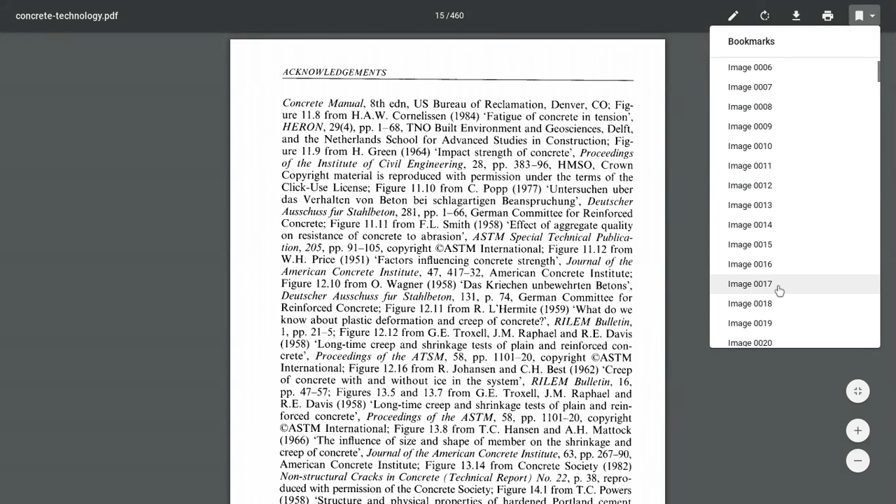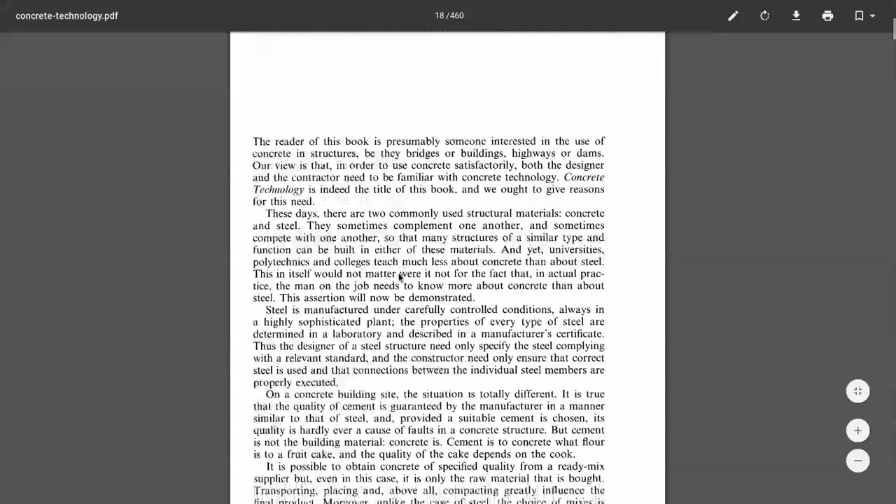Concrete is a structure material. What is concrete? Concrete is a material.

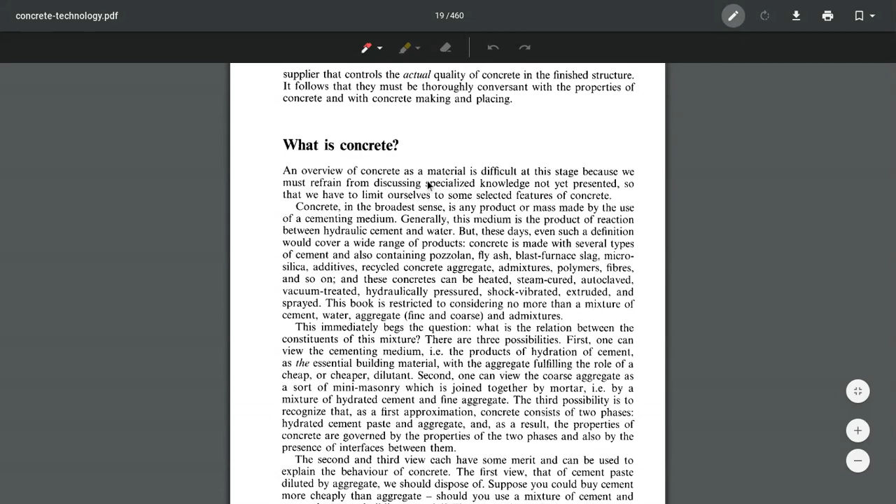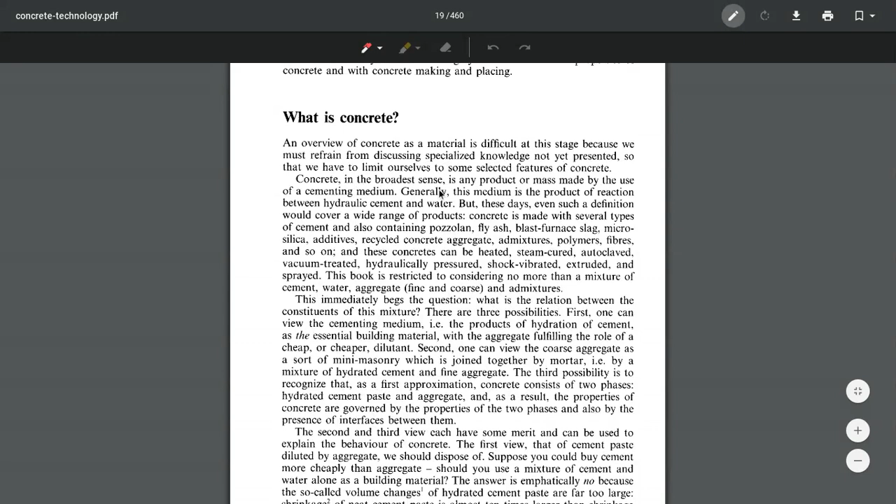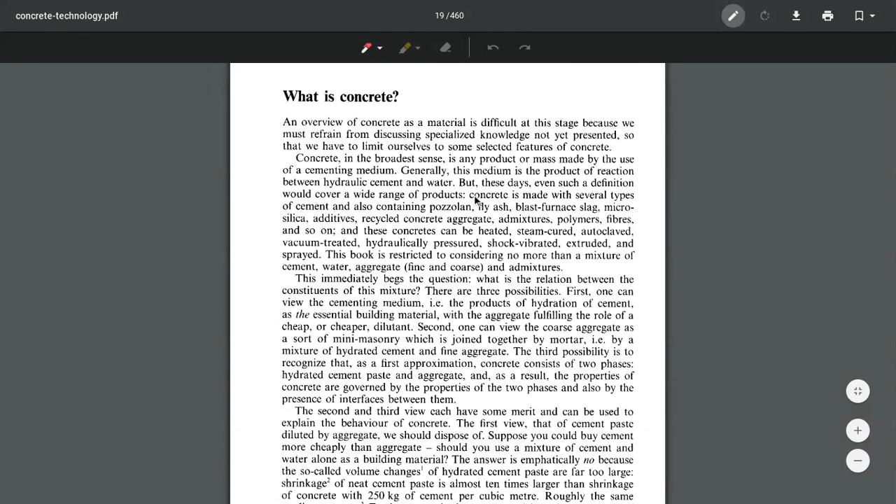Concrete is a composition of cement, aggregate and water at certain proportions, and the strength, durability and workability of concrete depends on the ratio of cement, sand, aggregate, and also the water cement ratio, that is the proportion of concrete.

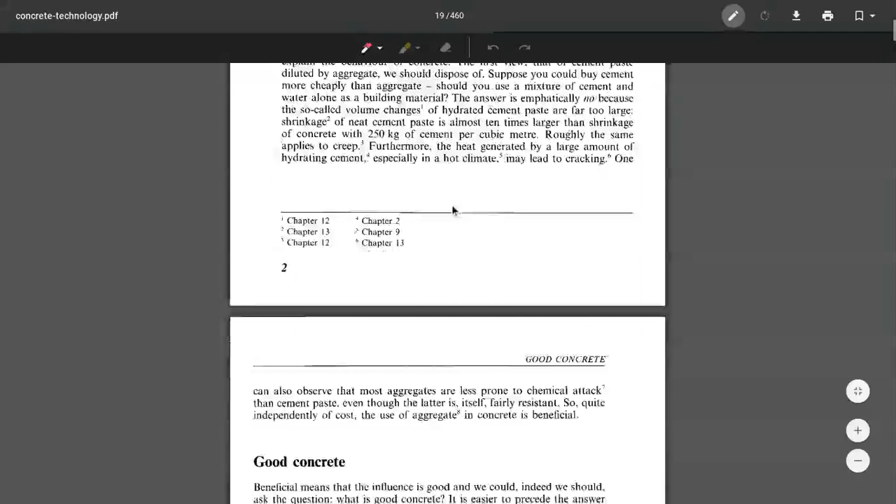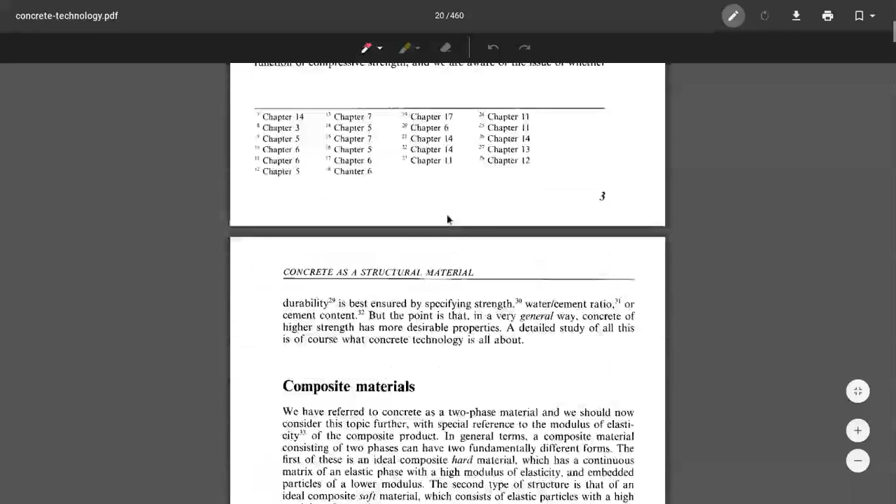We have referred to concrete as a two-phase material, and we should now consider this topic further with special reference to the modulus of elasticity of the composite product. In general terms, a composite material consisting of two phases can have two fundamentally different forms.

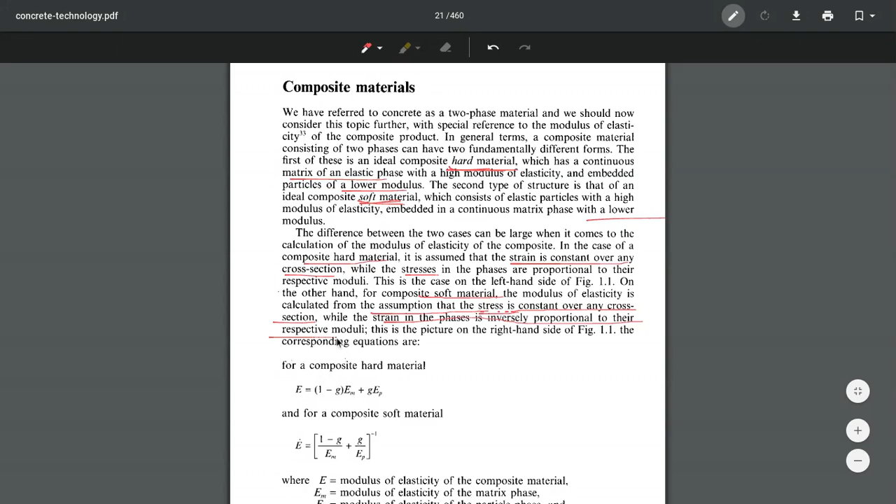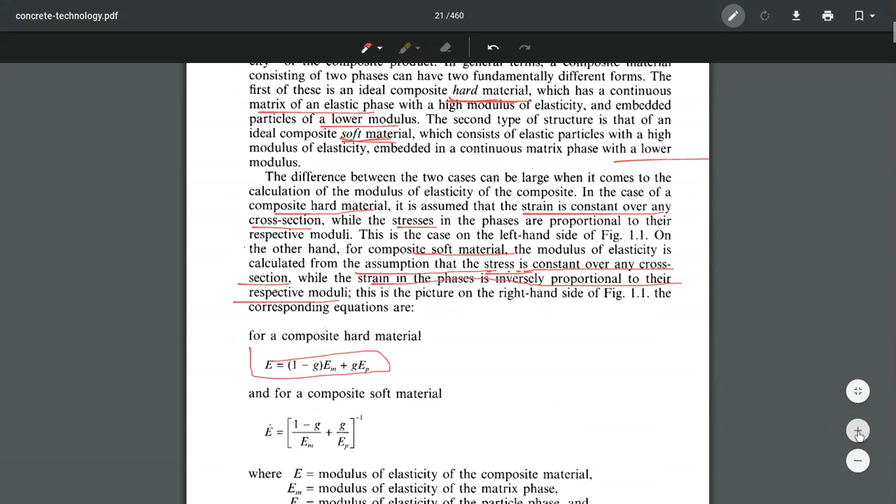So for a composite hard material, E equals 1 minus G times Em plus G times Ep, where E is the modulus of elasticity of the composite material, Em is the modulus of elasticity of the matrix phase, Ep is the modulus of elasticity of the particle phase, and G is the fractional volume of the particles. So E equals 1 minus G times Em plus G times Ep, P for particle phase, M for matrix phase, and 1 minus G is the fractional volume.

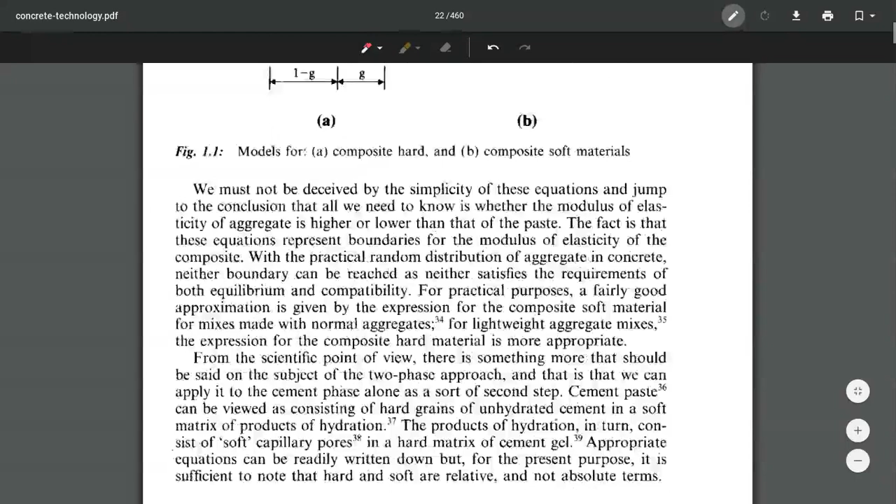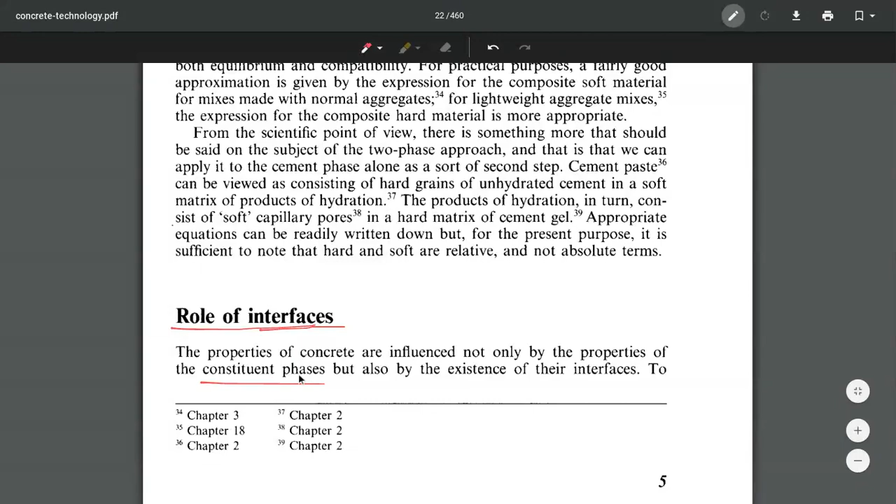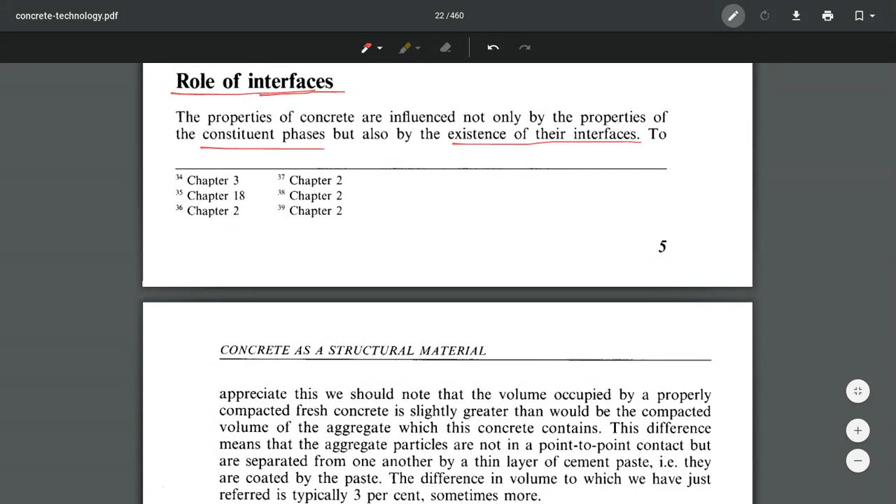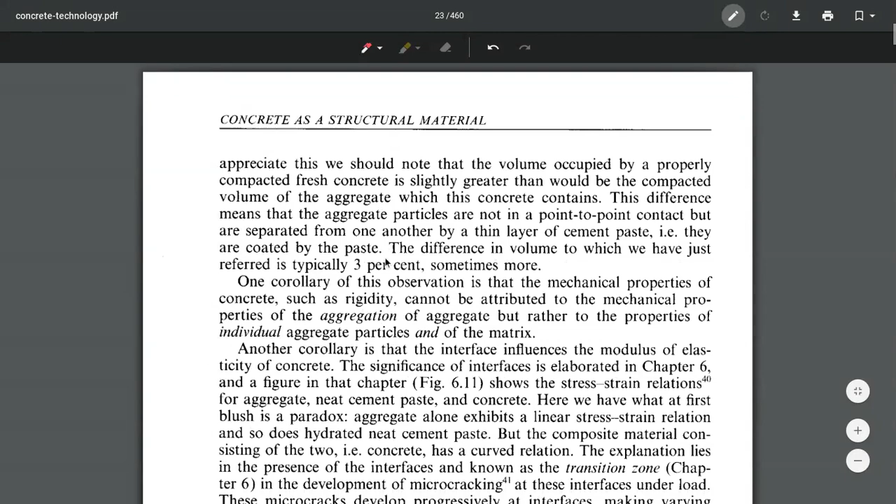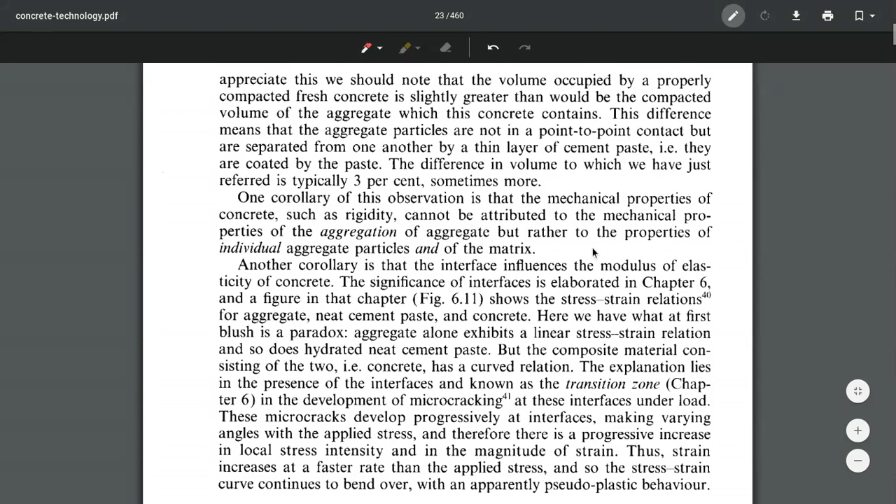One corollary of this observation is that the mechanical properties of concrete, such as rigidity, cannot be attributed to the mechanical properties of the aggregation of aggregate, but rather to the properties of individual aggregate particles and the interface, which influences the modulus of elasticity of the concrete. The significance of interface is elaborated in chapter 6.

Now, aggregate alone exhibits a linear stress-strain relationship, and so does hydrated cement paste, but the composite material consisting of the two, that is concrete, has a curved relation of stress strain. Aggregate has a linear relationship, but concrete has a curved relationship.

The stress-strain relationship is not really linear due to the composite phases. The explanation lies in the presence of the interface, known as the transition zone, and the development of microcracks that occurs at this interface under load.

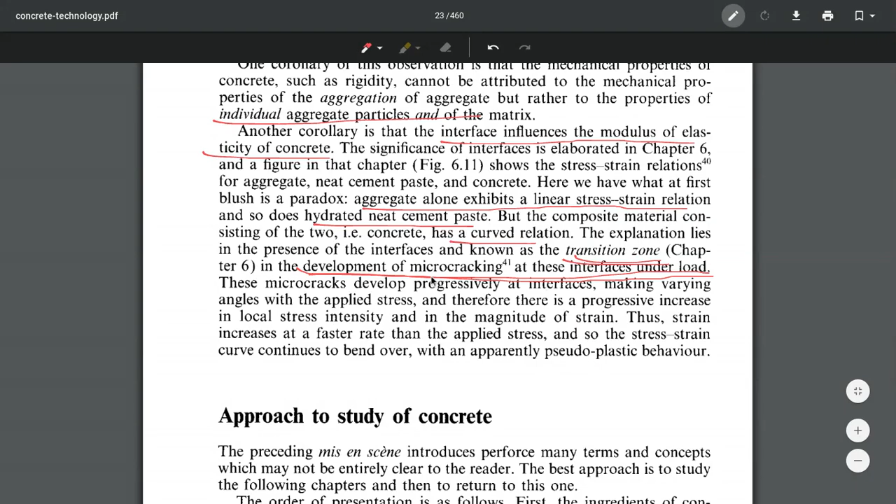The presence of interface is also known as the transition zone. The development of microcracks at this interface under load - microcracking occurs at the transition zone, that is the interface phase of the hard and soft phase of the concrete.

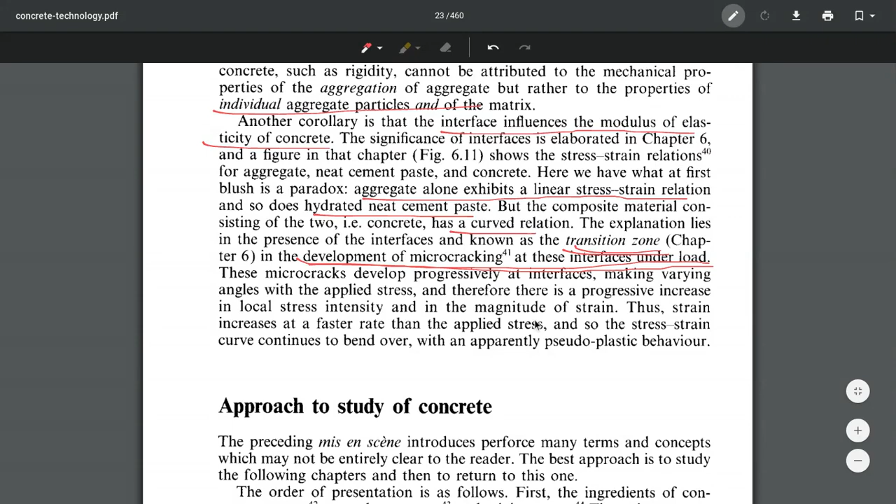So these microcracks develop progressively at interfaces, making varying angles with the applied stress, and therefore there is a progressive increase in local stress intensity and in the magnitude of strain.

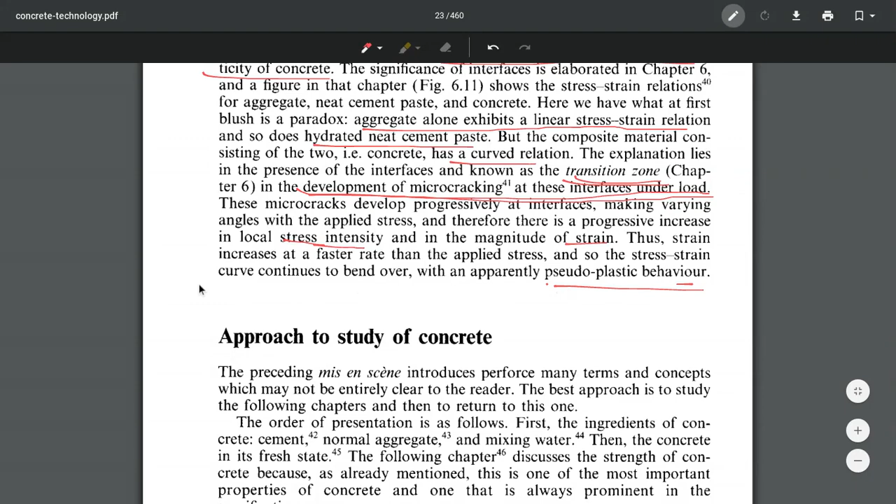Thus, strain increases at a faster rate than the applied stress, and so the stress-strain curve continues to bend over with an apparently pseudoplastic behavior. The relation between stress and strain becomes pseudoplastic, and the graph is curved in nature.

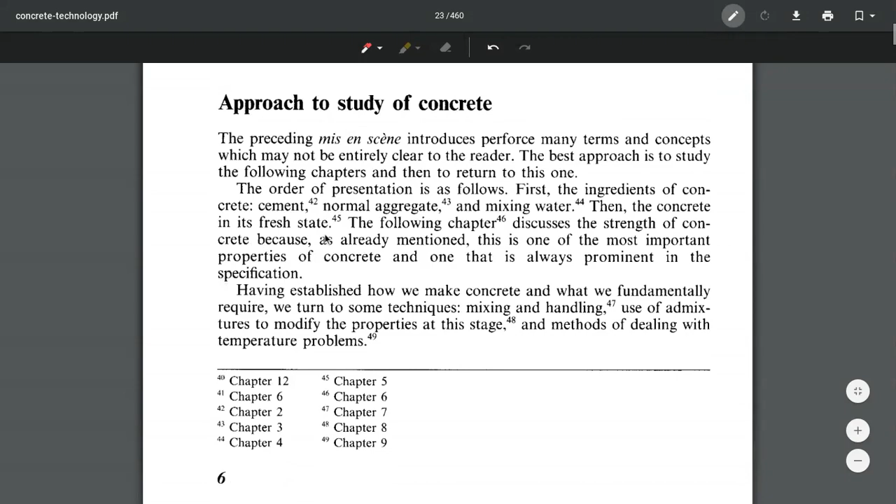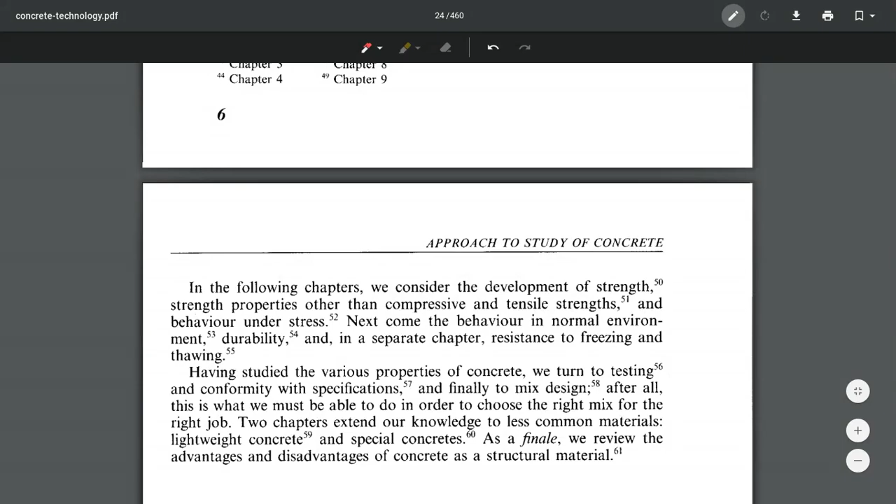Now we are heading towards chapter 2. Chapter 1 mainly covered cement, sand, aggregate and water as the constituents of concrete, and concrete has two composite phases, that is hard and soft.

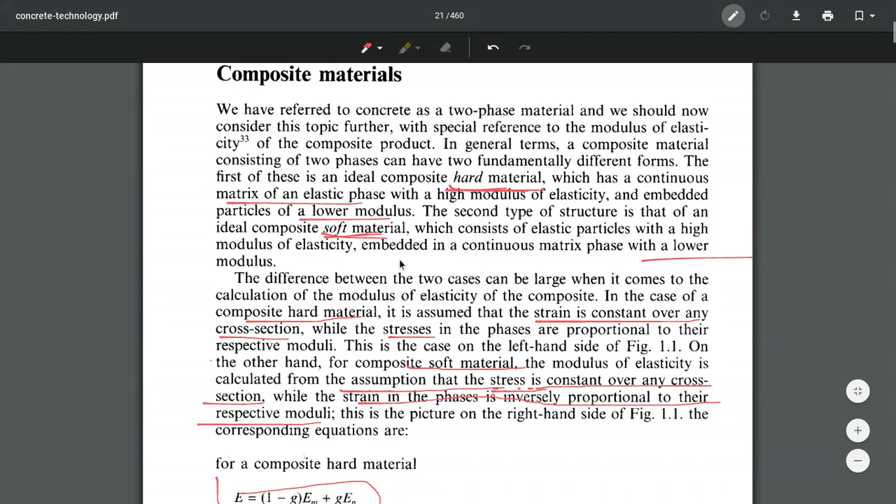There exist hard and soft phases, and an interface phase also known as the transition phase between the two. At the transition phase, the development of microcracks occurs under applied loading, and due to this, the transition phase is also known as the phase that determines the strength of concrete.

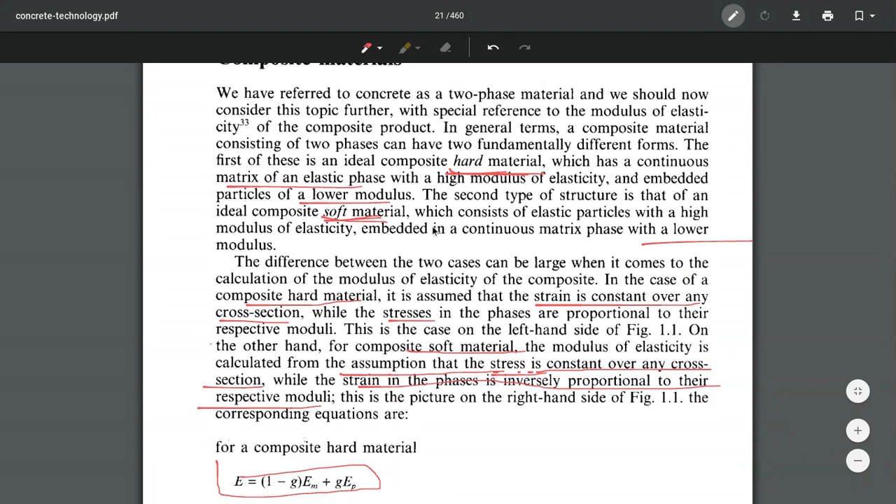So the strain-stress relationship is non-linear, that is curved in nature, for the concrete, but for aggregate, the strain-stress relationship is linear. For concrete, the strain increases rapidly compared to the applied stress, so the relation becomes curved in nature.

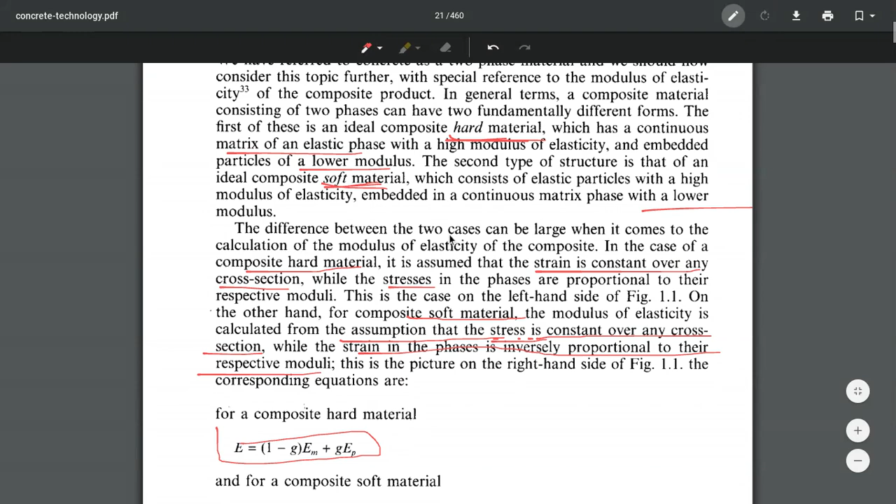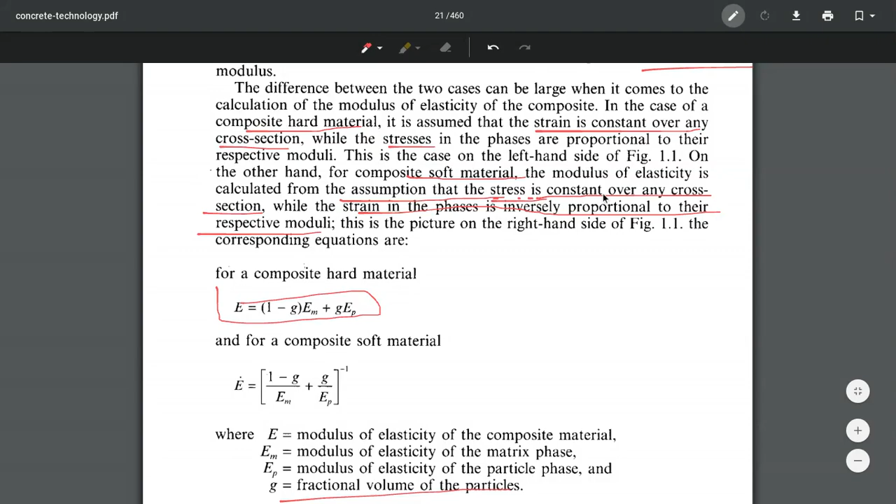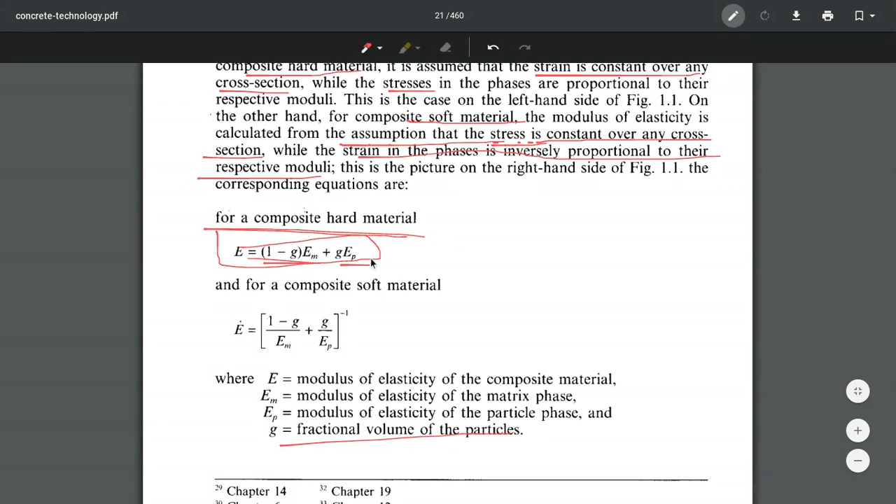For the hard material, strain is constant, but for the soft material, stress is constant. For the composite hard material, E equals 1 minus G, Em plus G EP. G is the fractional volume of the particles, Em is the modulus of elasticity of the matrix phase, and EP is the modulus of elasticity of the particle phase.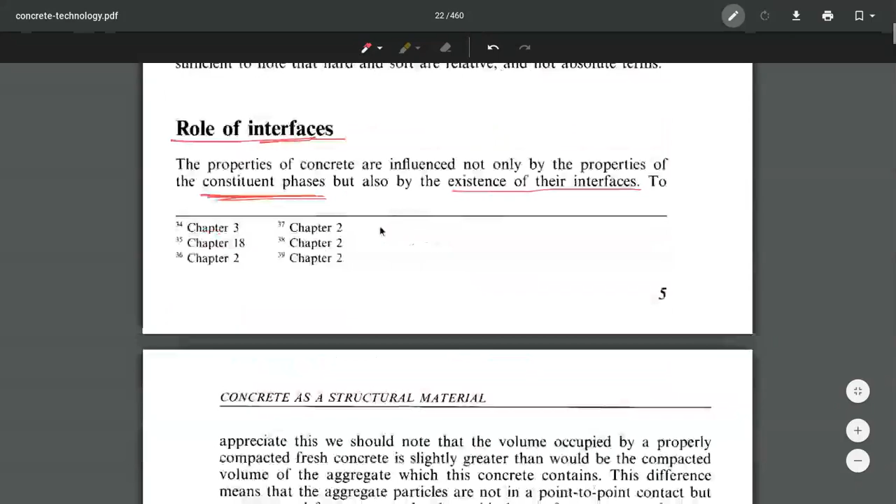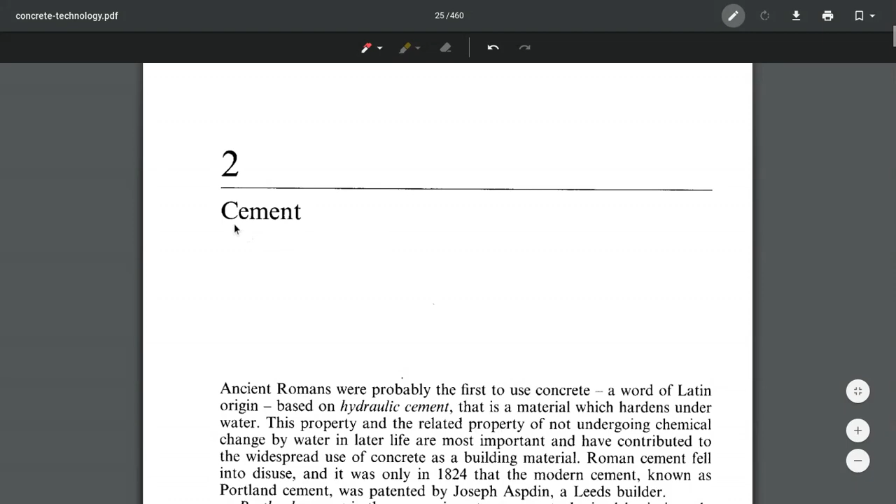Now the interface has the main role for the strength in this way. Our first constituent of concrete is cement.

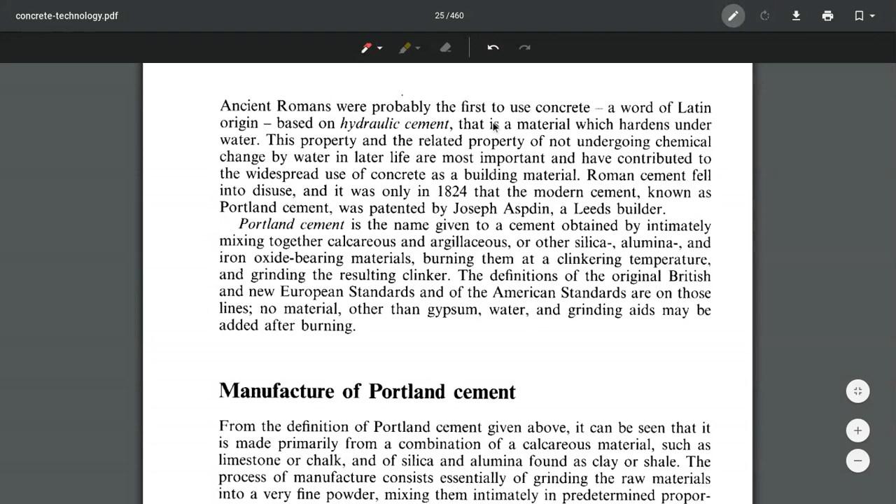Ancient Romans were probably the first to use the word concrete, of Latin origin, based on hydraulic cement, that is, material which hardens under water. This property, and the related property of not undergoing chemical change by water in later life, are most important and have contributed to the widespread use of concrete as a building material.

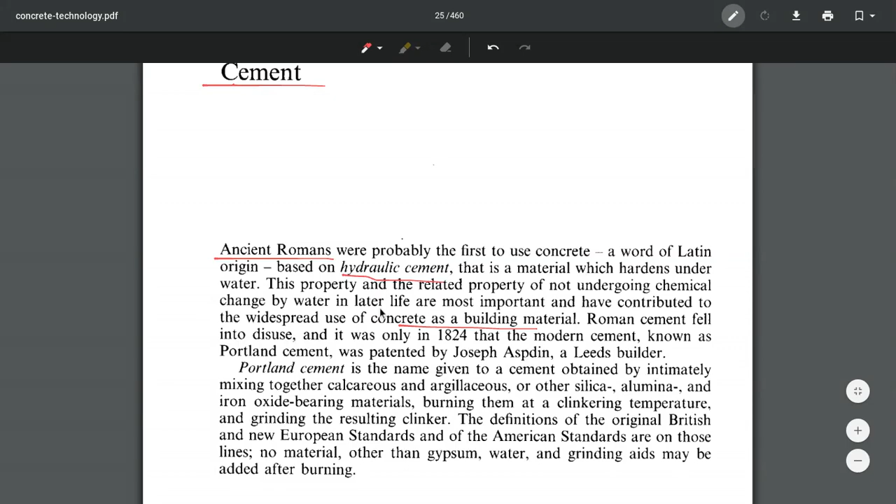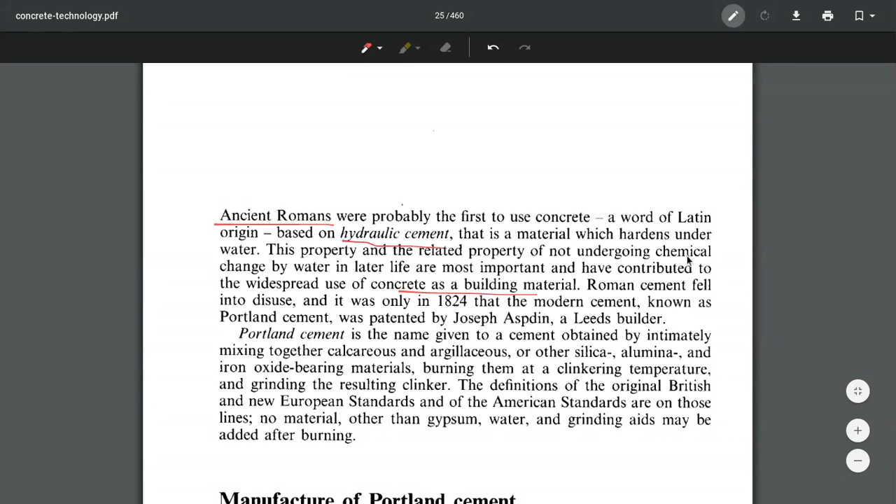The property of hardening in water and not undergoing chemical changes by water in later life are most important for the contribution of the use of concrete as a building material. Roman cement fell into disuse, and it was only in 1824 that the modern cement known as Portland cement was patented by Joseph Aspdin, a Leeds builder.

Firstly in 1824, this Portland cement was used. Portland cement is the name given to a cement obtained by mixing together calcareous and argillaceous or other silica, alumina, and iron oxide bearing materials, burning them at a clinkering temperature and grinding the resulting clinker.

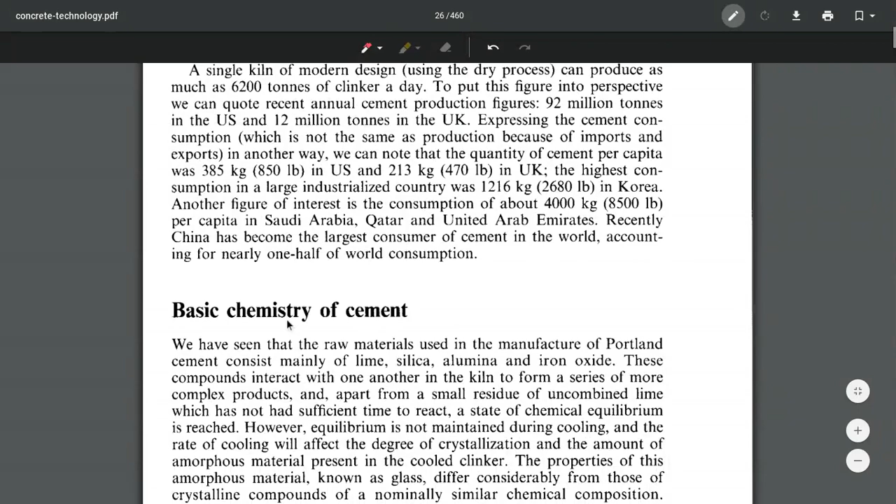Manufacturing process. Now, basic chemistry of the cement: we have seen that the raw materials used in the manufacture of Portland cement consist mainly of lime, silica, alumina, and iron oxide - that is, limestone, lime, silica, alumina, and iron oxide.

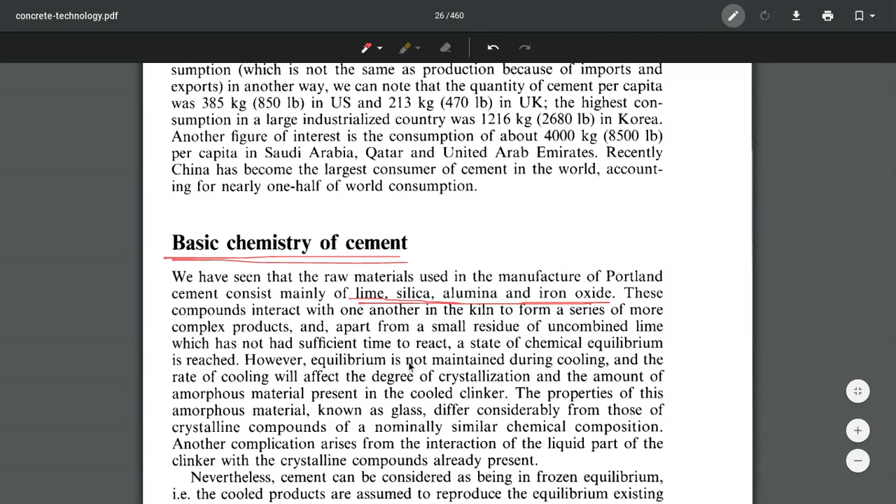These interact with one another and complex products are formed, a series of complex products, apart from a small residue of uncombined lime which has not had sufficient time to react, and a state of chemical equilibrium is reached during the reaction of cement consisting of limestone, silica, alumina, and iron oxide.

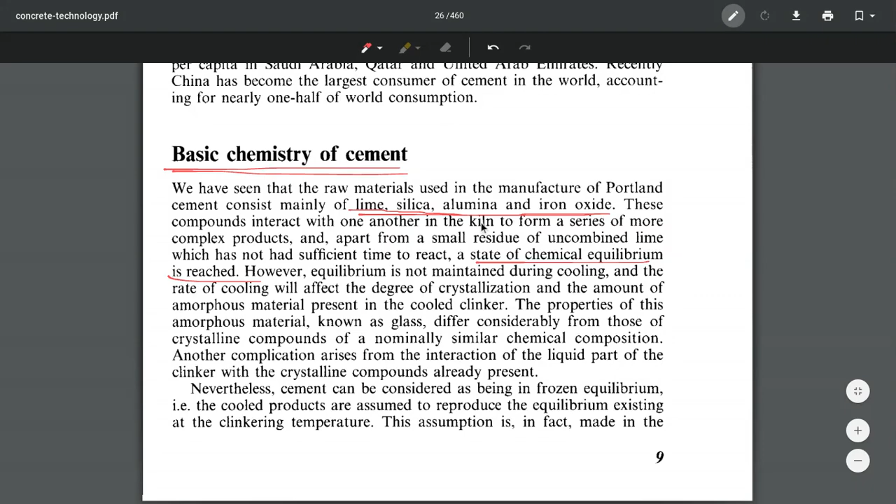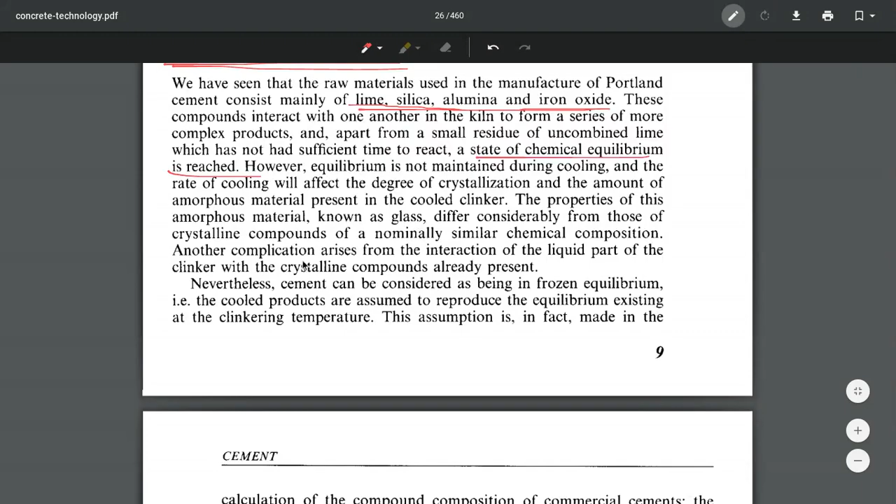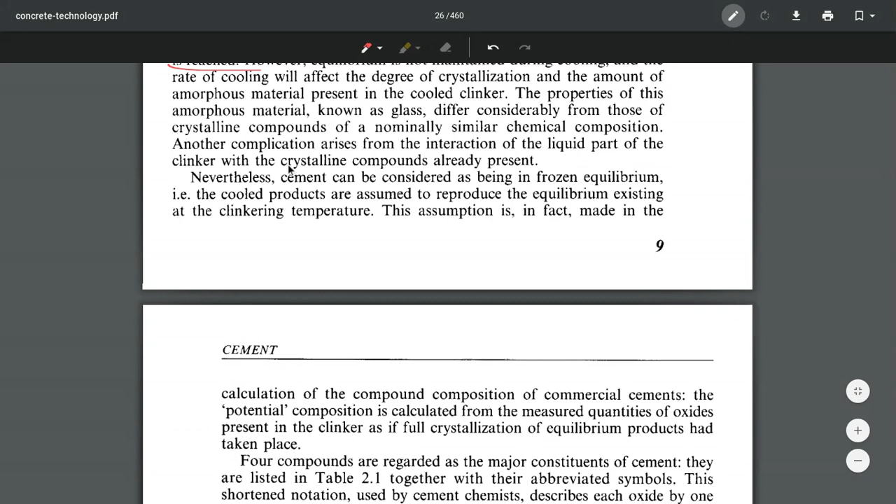Another complication arises from the interaction of the liquid part of the clinker with the crystalline compound already present.

Four compounds are regarded as the major constituents of cement. They are listed in table number 2.1, together with their abbreviated symbols. This shortened notation used by cement chemists describes each oxide by one letter: calcium oxide by C, silicon oxide by S, aluminum oxide by A, and ferric oxide by F. Likewise, water in hydrated cement is denoted by H. These are the main compounds in Portland cement.

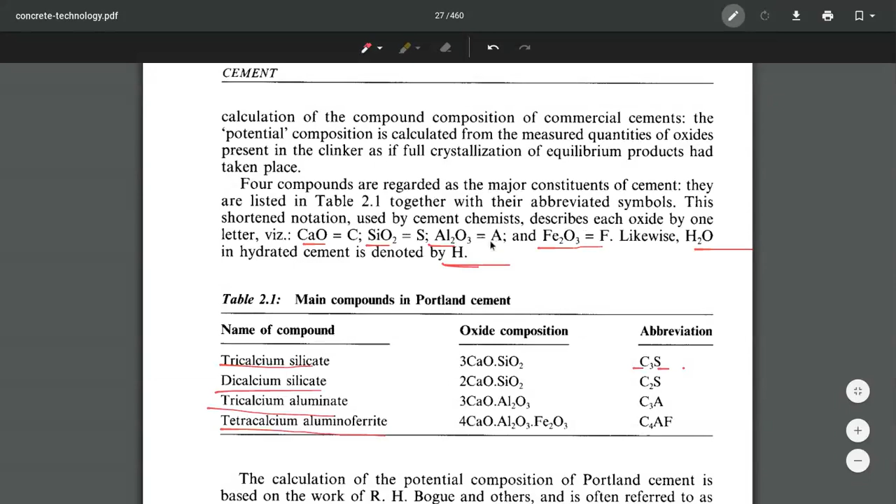So C3S, C2S, C3A, C4AF are the main four constituents of Portland cement.

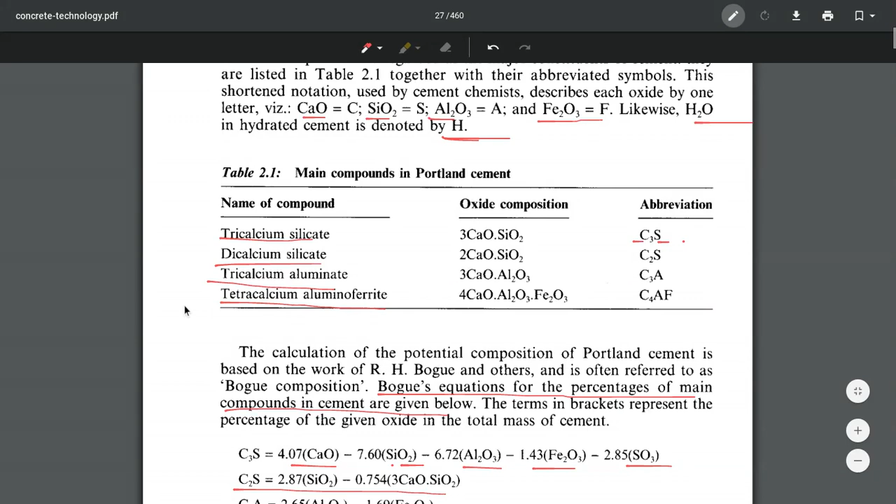We can determine the percentage of the main compound, that is, the percentage of constituent main compound.

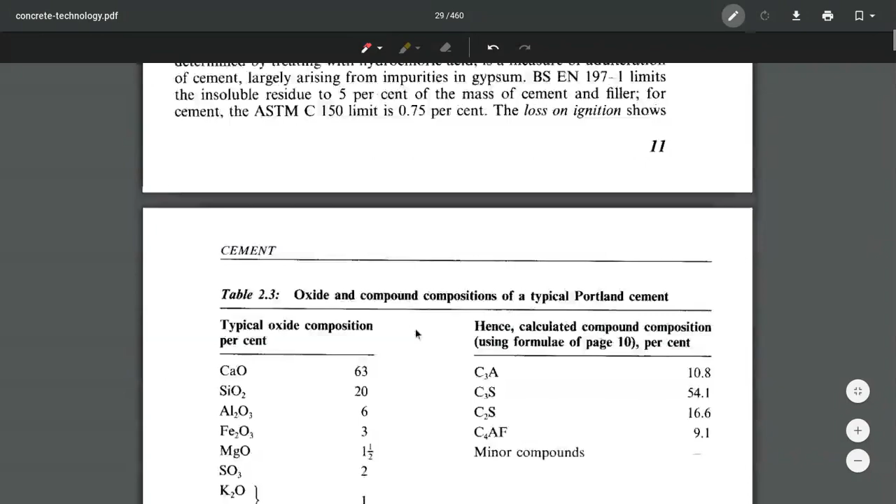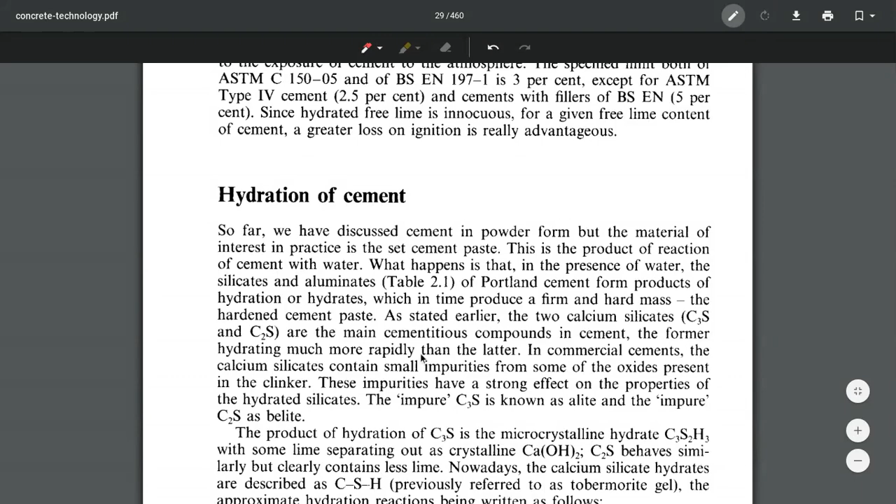The two calcium silicates, C3S and C2S, that is tricalcium silicate and dicalcium silicate, are the main cementitious compounds in the cement. The cementing material refers to these silicates, with the former (C3S) hydrating much more rapidly than the latter (C2S).

In commercial cement, the calcium silicates contain small impurities from some of the oxides present in the clinker. These impurities have a strong effect on the properties of hydrated silicates. The impure C3S is known as alite, and the impure C2S is belite.

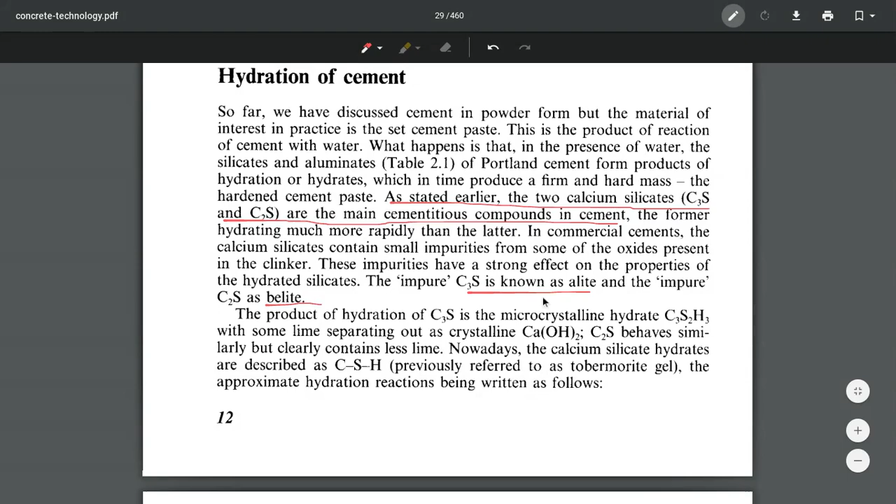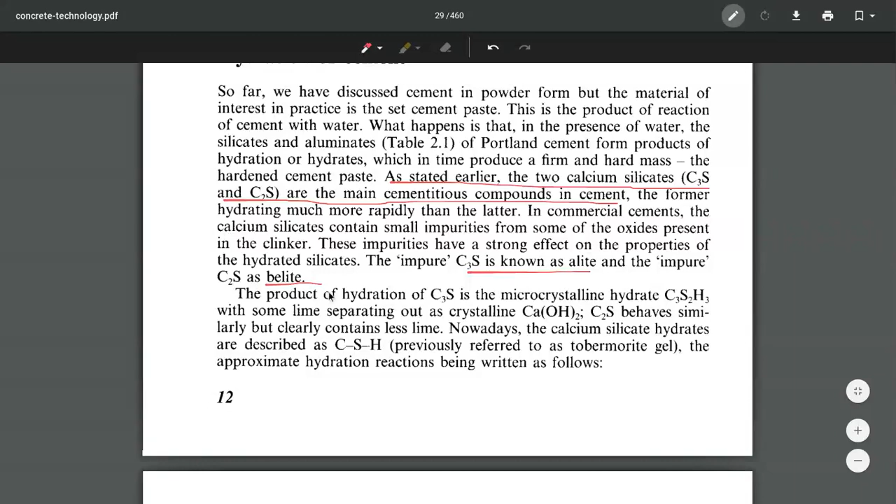The product of hydration of C3S is the microcrystalline hydrate, forming C3S2H3, with some lime separating out as crystalline material.

C2S behaves similarly but clearly contains less lime.

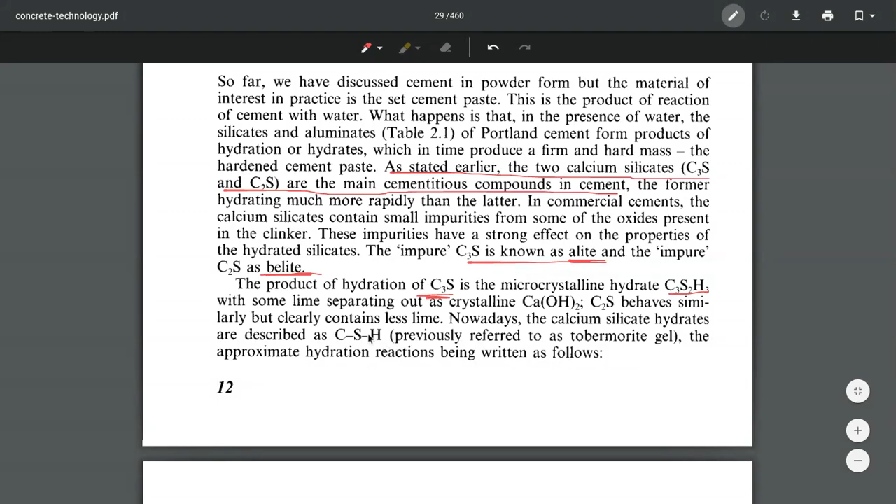Now the calcium silicate hydrates are described as the CSH form. CSH are hydrates of...